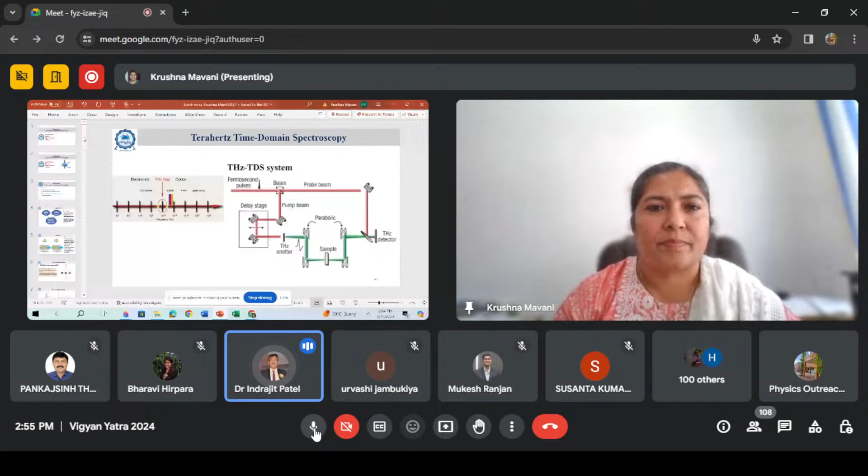Okay, I need to open my presentation, just a minute. I'll open my presentation and continue, just a minute. Can you see the slides yet? Window. Somehow I'm not able to share the PPT slide here. Please open the PowerPoint and there is an arrow upward present now, so your screen will be loaded. I have PowerPoint present. Open your Slides PowerPoint from presentation and then share the screen, that is the arrow upward. Yeah, I can see. Bottom. Yeah, thank you, that is useful. Wait a minute, share. Maybe I can try enter screen here, but it's not working. Yeah, but then I can see. Let us see. Can you see something now? Now if I open the slides, can you see? Now slides are visible, now go to the slideshow. Yeah, now I know, let me start from the beginning. Yes, can you see now? Perfect.

Yeah, so this is my topic, as you know, spintronics, a new route to futuristic technologies. So basically, let me start with the very fundamental idea of spin and charge, and how they originate from the electron.

You know that the electron orbits around the nucleus and has a spin momentum. Spin is the rotation of the electron around itself, and this spin, whether right-handed or left-handed, generates spin-up and spin-down states. So remember that spin has two states with respect to the up and down orientation, and the charge—electron carries charge. When it is moving in a medium, we call it current, when many electrons move in one direction. Now, since charge is associated with the electron and spin is also associated with the electron, which also has orbital motion, there is a spin-orbit-charge correlation which we generally harvest for applications in this area of spintronics.

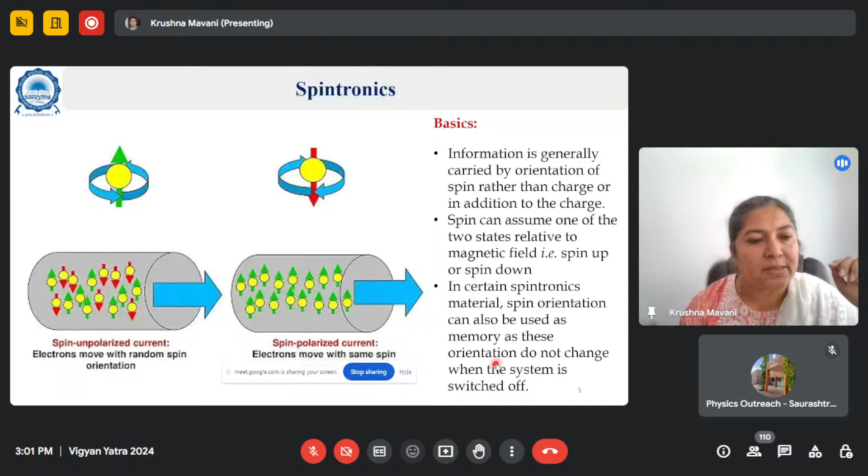Now you can harvest the spin functions as well, in addition to electronic functions. So this is the basic idea behind spintronics—information is carried by the orientation of spin rather than charge, or in addition to charge. Both are true. And when the system is switched off, in some cases the materials have a memory which can stay and doesn't go away. There are two types of memory, volatile and non-volatile. You should know that.

So the first thing we start with is giant magnetoresistance. This discovery was made by two scientists called Albert Fert and Peter Grünberg. In 2007, they were awarded the Nobel Prize for this discovery—the observation of giant magnetoresistance in a layered, thin structure. In the layered, thin structure, the spin exchange actually interferes with the electronic transport.

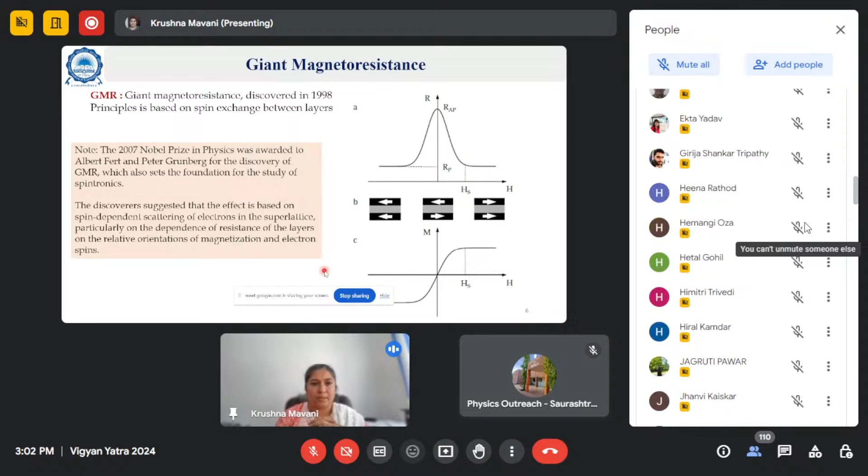So this discovery was very important, and it has set the foundation for the area of spintronics. The principle is that there are two layers—you can see in figure B here, I have shown the spin orientation of three different kinds. In the first one and last one, they are ferromagnetic exchange interaction. In the middle one, you have antiferromagnetic exchange interaction. In the case of a ferromagnet, if it is ideally parallel with each other, as you vary the external magnetic field applied to the layers, the resistance value is low.

What happens is, because it is ferromagnetically aligned, there is a spacer layer in between, and it is very easy for electrons to tunnel through because they carry the same type of spin. But when these materials are anti-parallel, what happens? There is a rise in the resistance—you can see the vertical axis actually rising up and showing a peak, and then again going down as you change the magnetic field again.

So this is basically like hysteresis. You can see this is your zero here in the center. If you increase the magnetic field towards the higher side, you can compare with the magnetization curve shown here—as the spin gets more and more parallel, magnetization is rising. At the end, the magnetization gets saturated at a certain value of external magnetic field. If you reverse back, in a soft magnet it will come back to the same path.

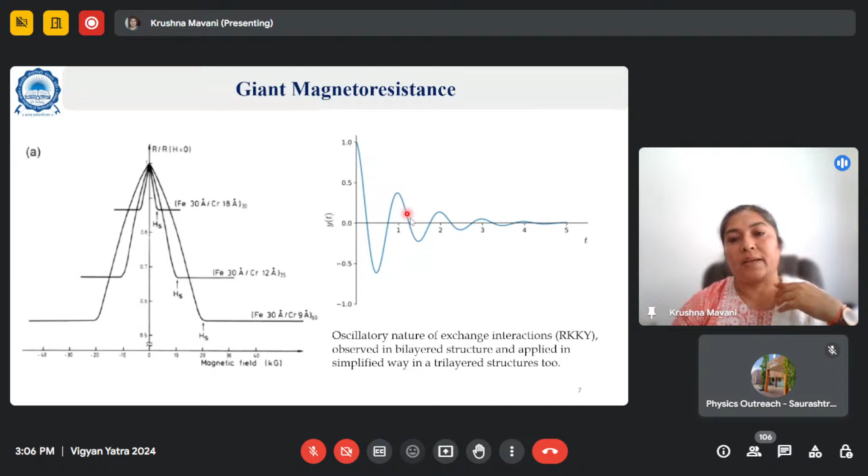If you vary the distance, I have shown one oscillatory function here. This one is typically shown as time dependent, but assume this is x, the distance, on the x-axis. As you vary the distance from one spin to another, it is ferromagnetic exchange interaction here, then as distance increases it goes to anti-ferromagnetic exchange, then ferro again, then anti-ferro again, and the magnitude is decreasing. This is harvested for

observation of giant magneto-resistance. Now that was very complex to understand. It was just a bilayer system when they observed it, only iron and chromium structure like this. So you have a spacer layer introduced between two magnetic layers. The spins are aligned parallel. If magnetic field is applied, they are first magnetized, then this is the situation.

This is just to understand how it works. Suppose you have one electron with a positive half spin, meaning spin up; it will go through easily without having any scattering at the interface. If it is spin down, reverse of this orientation, it will have multiple scatterings at the interface, and maybe it will not even pass through the multilayer.

This situation can be conceptualized as a kind of two-channel resistance circuit, which is easy to understand. Here you have a larger R, and if the spin is negative it will have more scattering at the interface, giving more resistance. Another channel, operative only for spin up, will have a lower resistance value. Similarly, this can happen for anti-ferromagnetic alignment, where scattering can take place at the interface for both types of spin alignment. This is understandable using this kind of diagram with a combination of larger and smaller resistances.

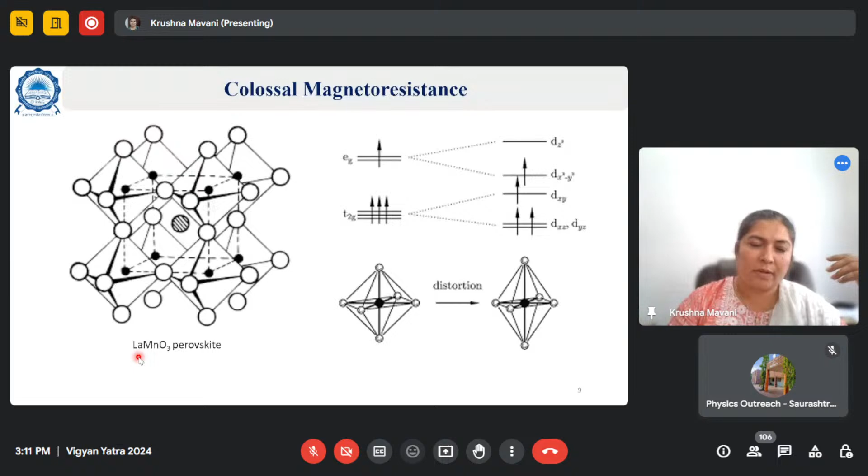This was the pure LaMnO3 perovskite. When I dope lanthanum - when I dope calcium at the lanthanum site, substituting maybe close to 25% - what do you see here? You have manganese converting into the 4+ state. Initially manganese is trivalent, but after divalent doping, it converts to the tetravalent state. So you can see 25% of the manganese ions in the tetravalent state here.

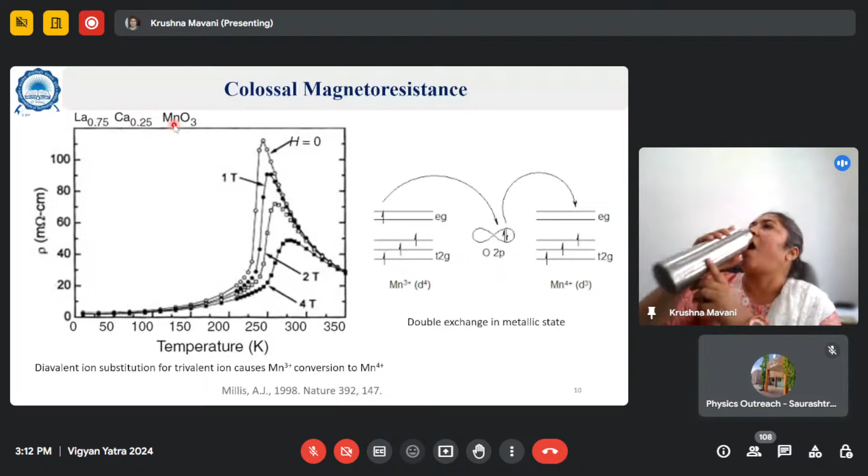As you apply magnetic field, what happens I would like to explain as a double exchange scenario. Initially your manganese was just 3+ and 3+, but when you have Mn-O-Mn chains with manganese trivalent and manganese tetravalent, the tetravalent manganese has a vacancy for an electron. Now the oxygen 2p orbitals overlap with the 3d orbitals of manganese.

So this electron can have double exchange. Once there is exchange with the oxygen 2p orbital, then again with Mn4+. So basically this Mn3+ and Mn4+ is a kind of dynamic state. While electron conduction is happening on application of electric field, when an electron hops from here to here, this becomes 3+ and this becomes 4+. So there is another vacancy here, and manganese on the other side can transfer the electron. This is the scenario called Zener double exchange.

A scientist called Zener proposed and explained it. Spins are parallelly aligned, so this scenario is possible when you have ferromagnetic spin exchange. So when more and more spins align, more and more double exchange of charge carriers is possible, so conduction increases and resistance decreases.

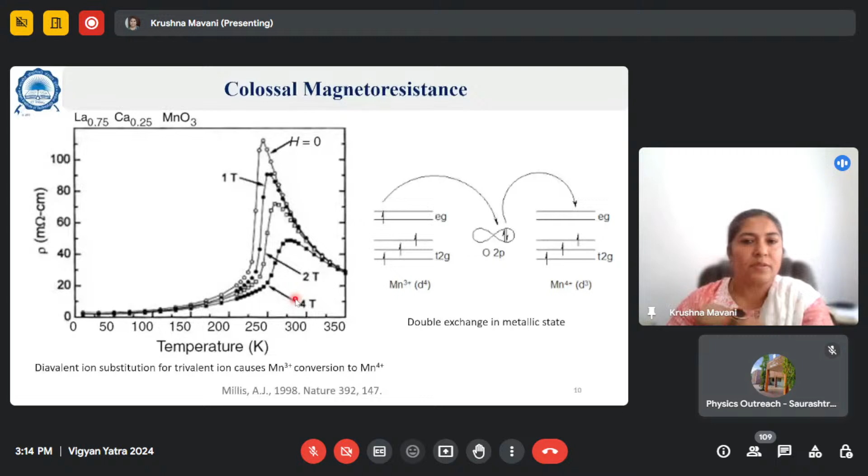So as you apply more and more magnetic field from 0 - H equals 0, 1 Tesla, 2 Tesla, up to 4 Tesla - this largely decreasing resistance is called colossal magnetoresistance, and since it is decreasing, it is called negative magnetoresistance.

Now there are some techniques and terminology which are recently observed. A few decades back they started, and many papers are available on this kind of material where they observe this kind of phenomena. These are some more recent techniques which I would like to briefly discuss.

Another one is tunneling magnetoresistance. This can happen even in layered structures. You can say the GMR case involves a bit of tunneling too, but let me explain this in detail. You have a barrier - a potential barrier between two magnetic layers. This potential barrier is actually produced by one spacer layer. This layer is conducting but has quite high resistance, so it's very thin, and the electron can tunnel through the barrier when you apply a magnetic field.

Let us understand - there are two situations given here. First of all, the TMR ratio can be defined. The TMR ratio is given in terms of P1 and P2, which are the polarizations associated respectively with the first layer and second layer here. How do you define polarization? Polarization is the number of majority charge carriers minus the number of minority charge carriers.

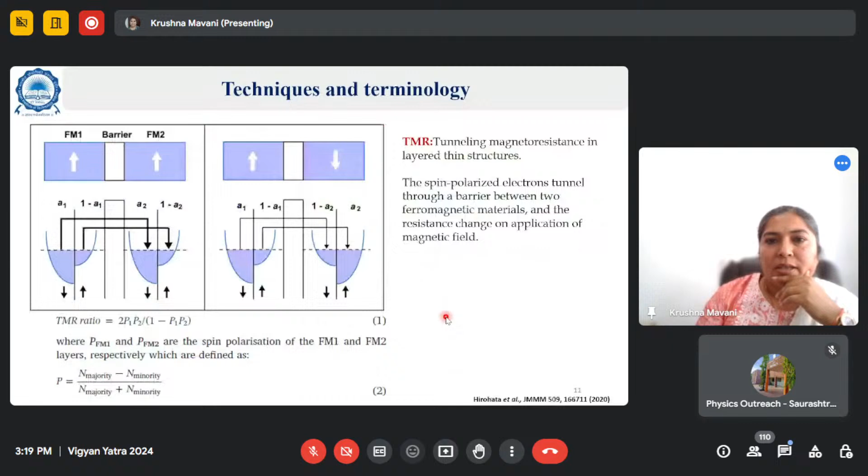Now this is spin transfer torque. This is spin alignment because of external magnetic field. Now we'll be talking about how, because of current, spin can actually be transferred from one layer to another. In this case, again I have shown you two different scenarios. It is used for magnetic switching, where here the fixed layer is fixed.

M fixed means magnetization is fixed, it is not free to move in any other direction. You have aligned fixed magnetization for one layer. Now you have a non-magnetic layer, which just helps the conduction, and it is thin, so electrons can tunnel through. And there is another magnetic material where M is free to move in any direction.

Now suppose your current is flowing from here to here, it means your electrons are flowing in the opposite direction, from left to right. So electrons are entering from this layer. They acquire, because of the influence of this, the magnetization acting like an internal magnetic field, which will influence each individual electron traveling through the layer. So as they travel, they now have some kind of spin polarization, and they go through the non-magnetic layer with the same spin polarization and enter here.

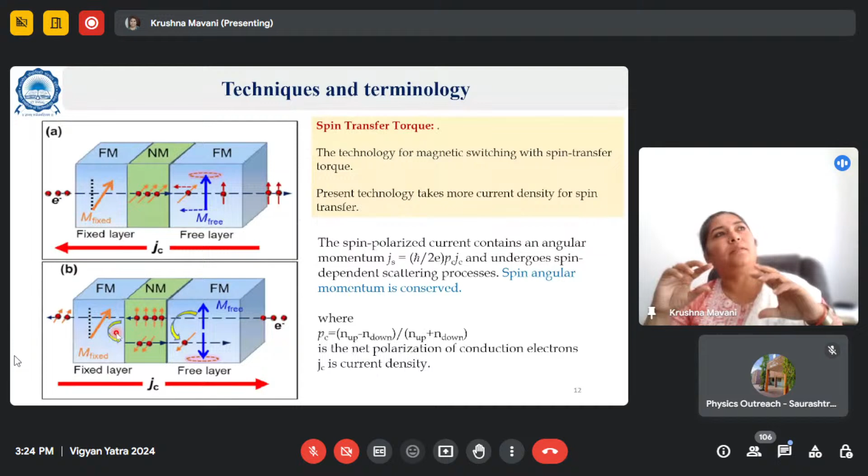It's like optical waves, when they get reflected back, there is actually a phase change. Similarly, if you see, they are tunneling through, there are quantum mechanical phenomena involved. So then they reverse back, and you have a torque generated in the opposite direction. They can't go through because of the scattering process at the interface. So in the reverse direction, you get this kind of spin alignment, here you have a spin-up kind of situation, and here slightly different.

Now there is another technique called racetrack memory. This is very recent, and many predictions have been made by IBM. I think in 2019 they started predicting this kind of 3D memory for computers. Here, domain wall movement is present. The name racetrack memory was given because initially the design looked like a racetrack, but now the design is slightly different, so nowadays people call it domain wall memory, because domain wall movement is involved.

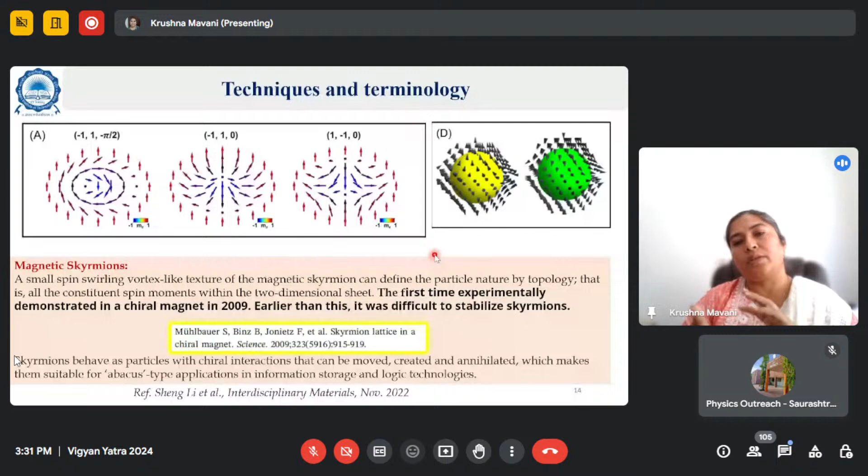Now these are kind of 3D skyrmions predicted to happen in some materials, where you have different types of spin alignment changing in a sphere pattern on a sphere. This has not yet been observed experimentally, but even optically you can tune these skyrmions, and many more research papers are being published in this area.

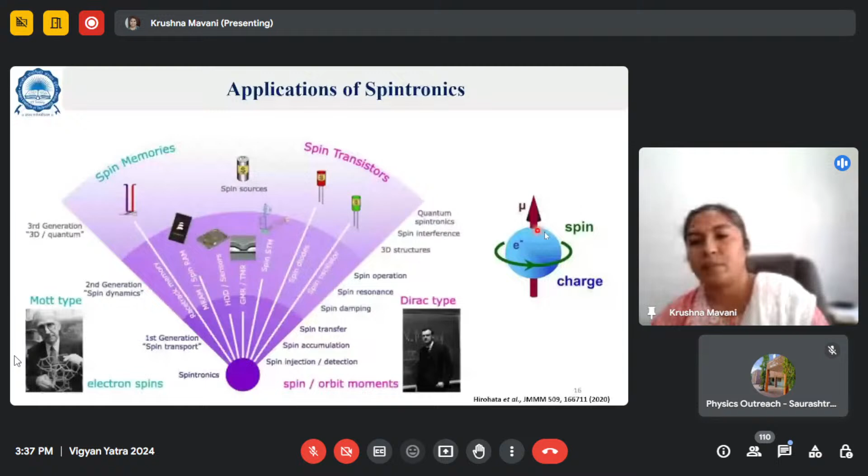So this all happens, as I showed you earlier in this figure, because originally it is coming from electron spin and charge, both. Spin can generate a spin momentum, orbital motion can generate orbital momentum, and these two correlations produce this Dirac type of materials.

So there is another thing now. These are the materials which can be used for spintronics, but there should be some way. You connect contacts, wires, which are non-magnetic materials. So how to inject spin polarized current? How to generate spin polarized current there, and how to carry it forward in circuits?

So there are a variety of other mechanisms available to do so. I have given one example here. The most common method is injecting polarized spin current from a ferromagnetic metallic conductor to a non-magnetic material, and then it carries the spin forward. If it scatters more, you lose it. So generally they are thin non-magnetic materials.

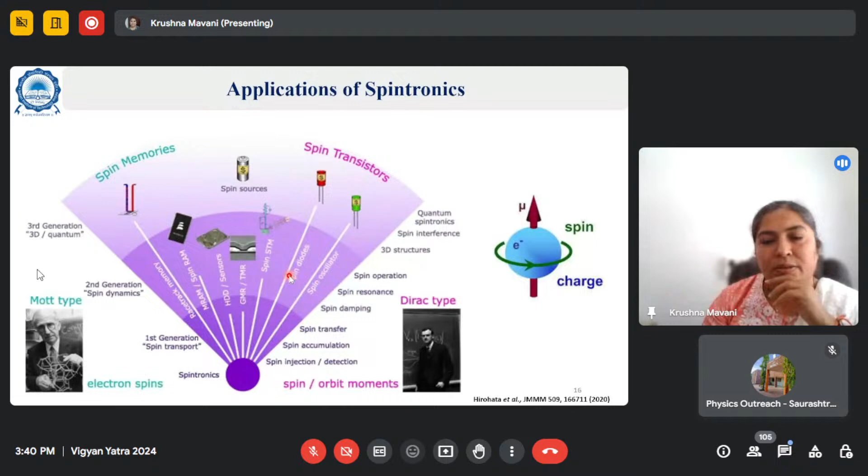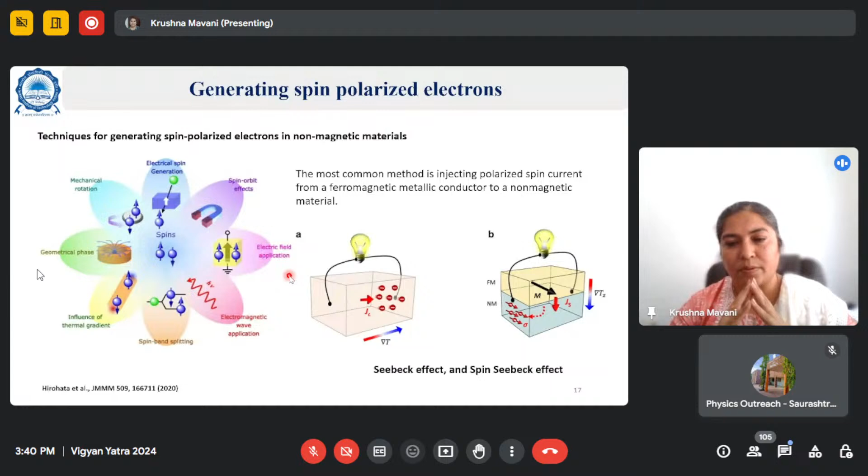So as an example, till now you have seen many applications, many terminology and different phenomena, and these are just a sample. If you go into details, I have always given some references here, you can refer to that.

It can be Fe-Mo or some other chromium and Mo. So these kinds of situations are possible. These B sites you can generally play with. Generally 3d metal ions occupy B and B prime sites, and then oxygen 6. So if it is perfectly alternate position, you call it a double perovskite because the unit cell is doubled.

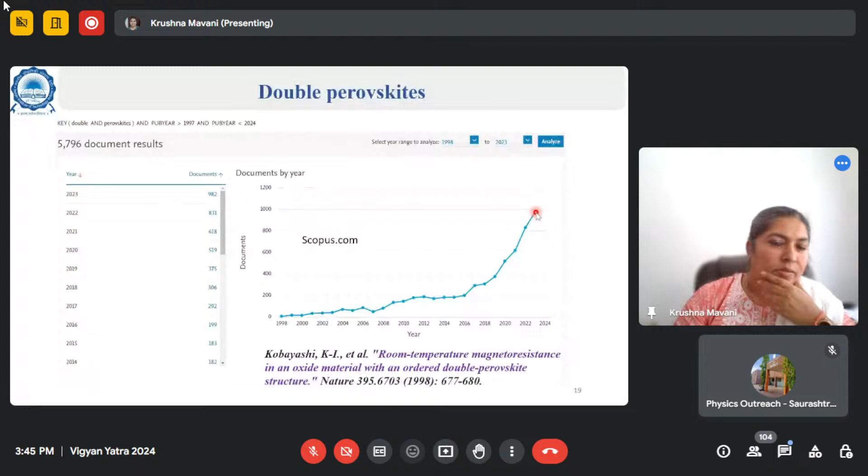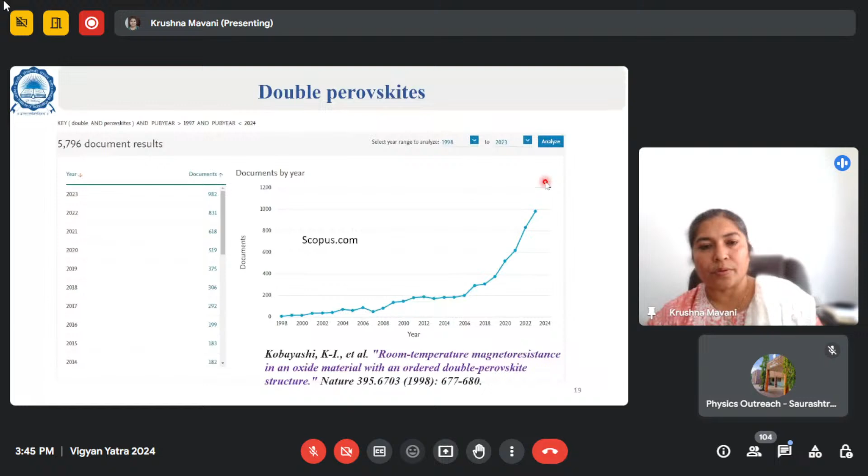If I search using 'double perovskites' in Scopus, you see in 2023 it's like 1,000 papers published with the keyword double perovskites. There can be many more. I just searched using Scopus here, and whatever is shown, I'm showing here. So it's consistently rising, and you can predict it's going to rise only because of this rise in the area of spintronics and their technology.

So these double perovskites generally have this kind of composition, where A site is occupied by strontium, then iron, molybdenum, and oxygen 6. Generally strontium is studied a lot. There are few papers also where you replace strontium with calcium and barium.

That is why they are studied, because at room temperature, if you want to use spintronic devices, you have to have magnetic ordering above room temperature. As you decrease the temperature, it will remain in the same magnetic state, whatever is achieved. There are no structural transitions involved, so it is more desirable.

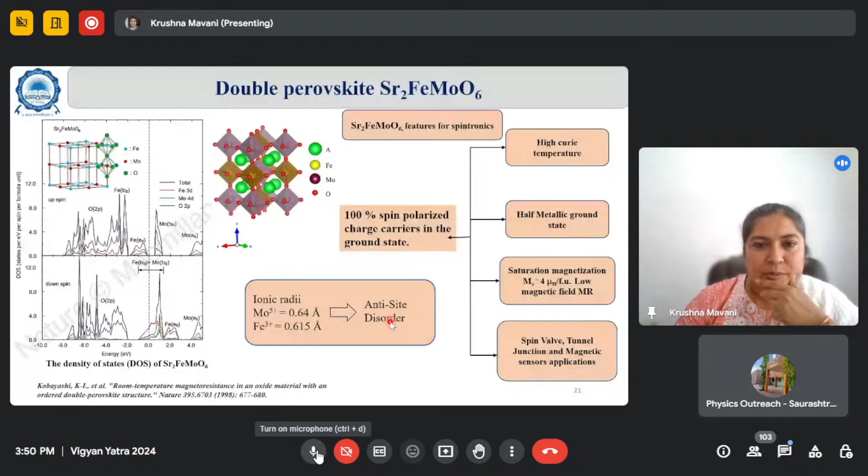By the way, how much time may I have? It looks like I have taken more time. Hello? Five to ten minutes, okay, then maybe I'll skip a few things.

Here I would like to show you that when you do thin film deposition, generally thin film deposition of double perovskite is not so easy. Only PLD grown films are generally shown to have half metallic nature and perfect cation ordering.

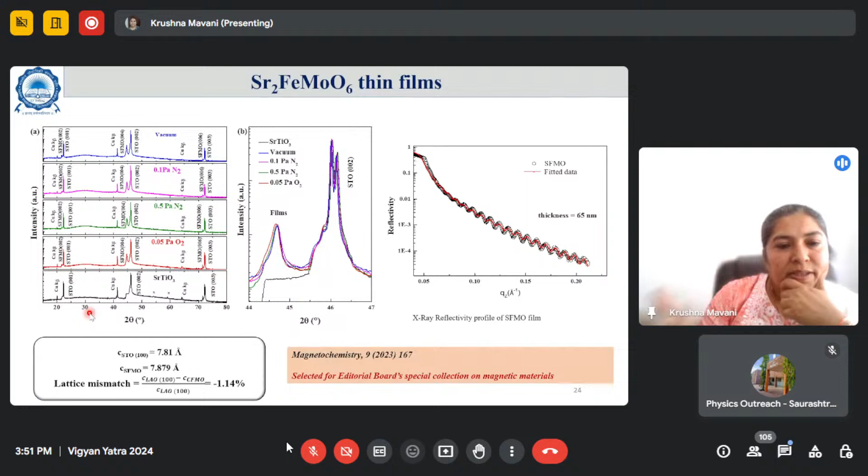One important feature we observed in our laboratory is that when you vary the background gas pressure from low to high, you can see impurities coming up. So what we observed is that it is better to have vacuum and deposit the films, giving very high cation ordering at the B site. This was published in Magnetochemistry recently and was selected for a special collection. We could see that as we changed the gas pressure, the highest cation order was observed only in vacuum. Later on, whatever we deposited, we went ahead with vacuum only.

So these kinds of films with different gas pressures, the maximum was always achieved in vacuum, shown here by the highest magnetization. Now you may ask me why highest magnetization shows that it is a high cation order. The reason being...

Fe-O-Mo exchange is ferrimagnetic in nature. Ferrimagnetic means one sublattice has up spin, the other has down spin, but unequal in magnitude. So the compensating spin is smaller in size, giving some net positive magnetization. This situation arises only when you have an alternate Fe-O-Mo arrangement. Otherwise, it is antiferromagnetic or paramagnetic, which does not contribute so much to the magnetization. So it is a clear indication: higher the magnetization, higher the cation order.

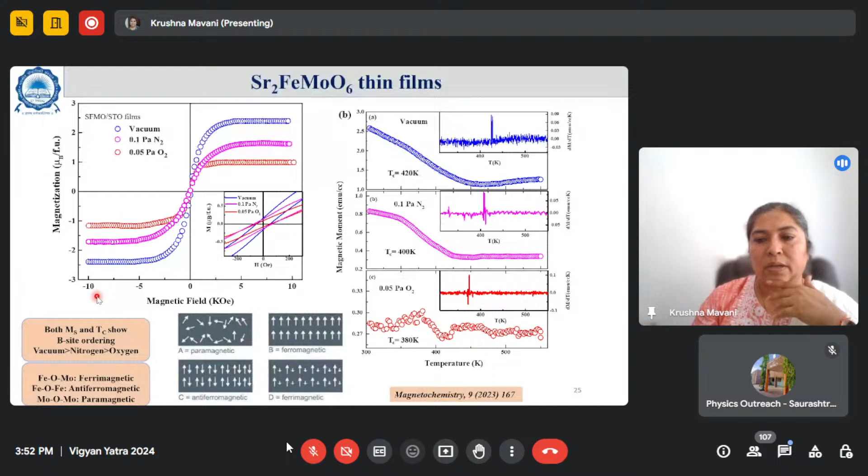That we have observed clearly in our thin films.

We have another feature added here in addition to vacuum. If you choose your crystal very wisely, 100 oriented or 111 oriented, depending on that you can also control your cation order. As you control the cation order, the half metallicity is intact, and you can have more and more spin polarization in this material. This alignment is possible when you have 111 crystallographic orientation beneath the thin film.

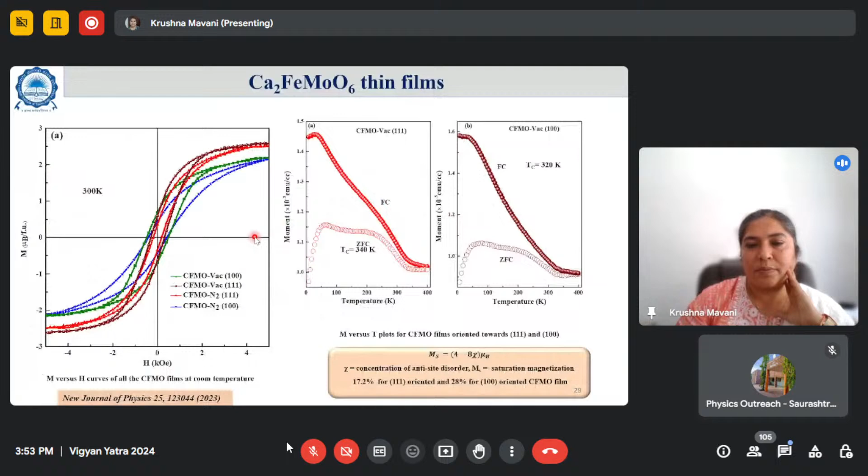We have proved this efficiently using a variety of experiments, including terahertz time domain spectroscopy and Raman spectroscopy. In Raman spectroscopy, we did temperature dependent Raman spectroscopy of selected thin films having very good cation ordering, and found that this variation in Raman shift can be fitted to the Balkanski model, where the anharmonicity coefficient can help us understand whether there is any coupling between spin and phonon.

So spin phonon dynamics are coupled, which can be seen very clearly in our results, because there are drastic deviations from the trends near the transition temperature. This is the first such experimental observation found in double perovskite thin films, published recently in New Journal of Physics. Earlier, no such spin phonon coupling had been reported in bulk of these materials - only thin films show this kind of coupling, and we could observe it experimentally by various techniques.

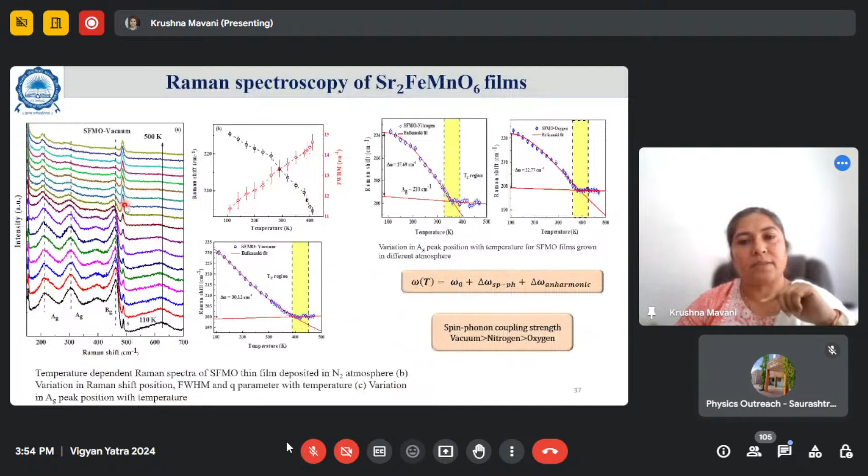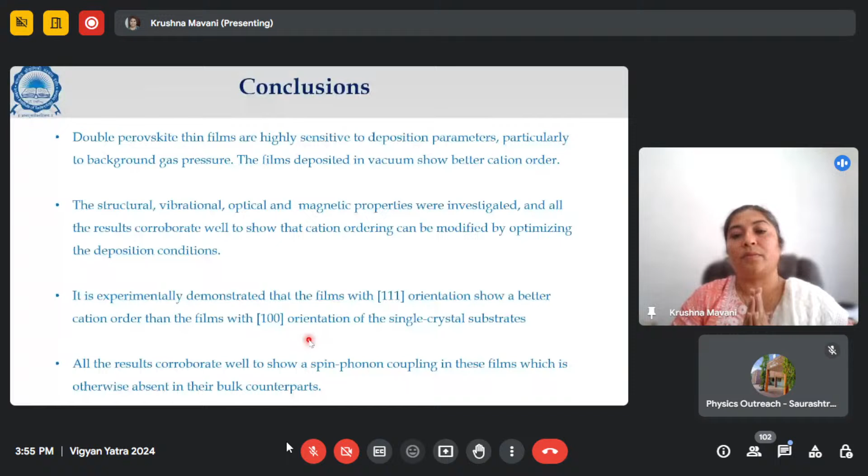So to conclude, these double perovskite thin films are highly sensitive to deposition parameters, particularly the background gas pressure. We have successfully produced nice films in vacuum conditions. We did various experiments and modified them as per different deposition conditions and substrate orientation, and experimentally demonstrated that 111 orientation is best to get the cation order. Our results corroborate very well to show that there is spin phonon coupling in these thin films, which is absent in their bulk counterparts.

I would like to acknowledge BRNS and SERB for funding these projects, and the DST FIST project of our physics department at IIT Indore, under which we have procured a Raman spectrometer. I would also like to acknowledge my two students, Dr. Ekta Yadav and Mr. Ketan Naule - this is the PhD work of these two students, and presently Ekta is a postdoctoral researcher at IISc Bangalore.

This is my research group at IIT Indore. Some alumni are present here - he's working at IISER Bhopal at present, and she's an assistant professor in a private college in Indore. Thank you all.

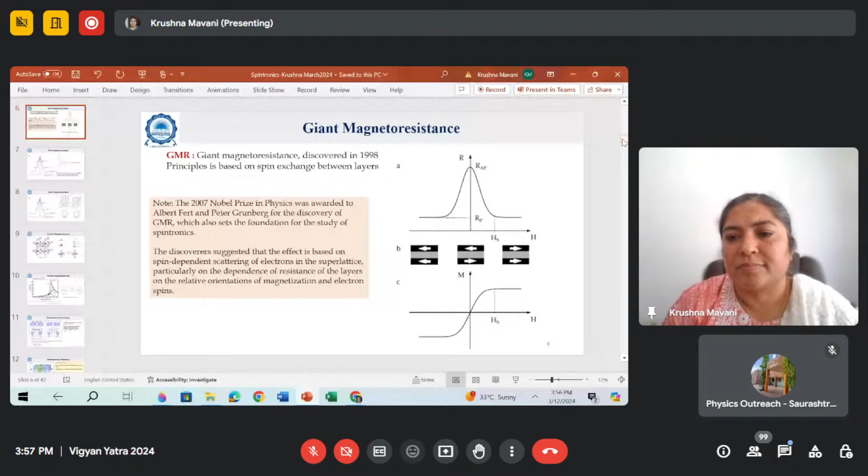Hello. Hello. Hello, madam. Hello. Hello. I think there's some technical problem. Madam has left. Anyone?

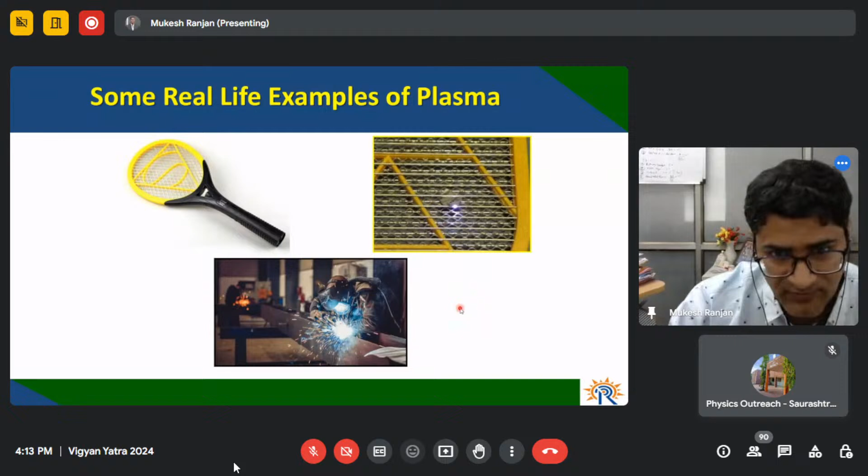If you've seen, I've presented different kinds of examples—one is the welding example, where welding can actually melt the material, and in some cases you can touch the plasma. That's the reason plasma is basically divided into two categories: cold plasma and hot plasma.

Cold plasma has many applications, like surface modification, which I'll discuss later. Another type is hot plasma, where the electron temperature is roughly equal to the gas temperature and the ionization is very strong. It also has many applications, like waste disposal and metallurgical applications. So my talk will cover both types of plasma—cold plasma and hot plasma.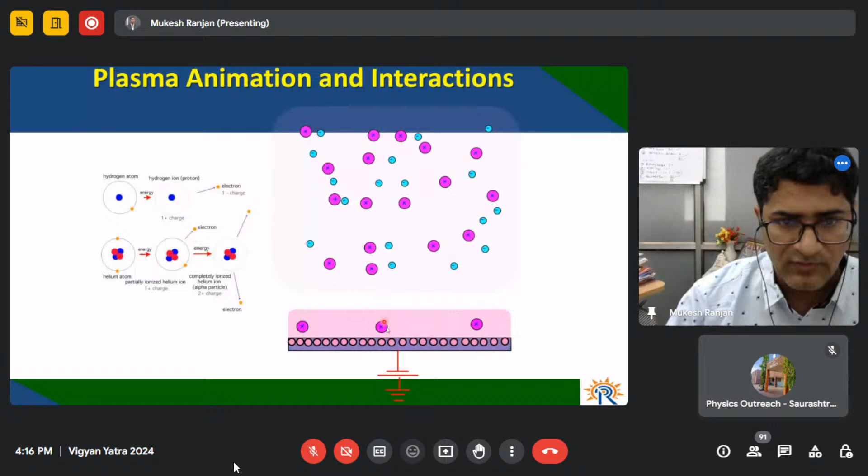Whenever some surface comes in contact with plasma, the ions start bombarding it. In this picture, I've given a negative DC power supply connected to some surface. When this surface comes in contact with plasma, the ions from the plasma start hitting it. In this way, the surface can be modified with the help of plasma.

So plasma has many applications in different directions. The first one is the automobile industry, where different kinds of coatings—anti-reflecting coating, super hydrophobic coatings, DLC diamond-like coatings—are used in different parts of automobiles. Tokamak is the fusion reactor where people are trying to make energy like the sun makes continuously. Worldwide research, including in India, is going on for tokamaks for energy generation as a futuristic project. The third one is waste disposal, where energetic plasma torches are used for waste disposal. Agricultural plasma also has many applications in agriculture. So I will touch all these topics one by one while showing you some examples: medical, textile, nanotechnology, and space.

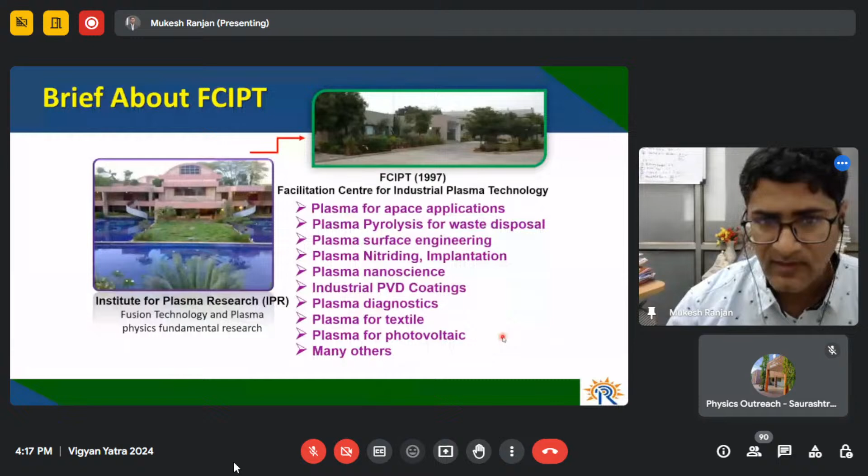The first example I'm going to show you is plasma technology for waste disposal. Nowadays waste is a very big threat for any growing city. You must have noticed that all the waste is collected from your home and then it piles up at the end of the city. After some time, the city gets extended, and some people end up living very close to the area where all this waste is piled up. So it's a big problem for the people living nearby.

You might have seen smoke coming out from this waste, because in these places the government tries to use incineration, where they dump the waste and burn it using kerosene oil or petrol. If some waste comes from a hospital and is hazardous, or has some deadly virus, it can also spread to the nearby slum area. So waste treatment is very important and crucial, and I think it's a very important key topic for the modern city concept that has to be taken care of.

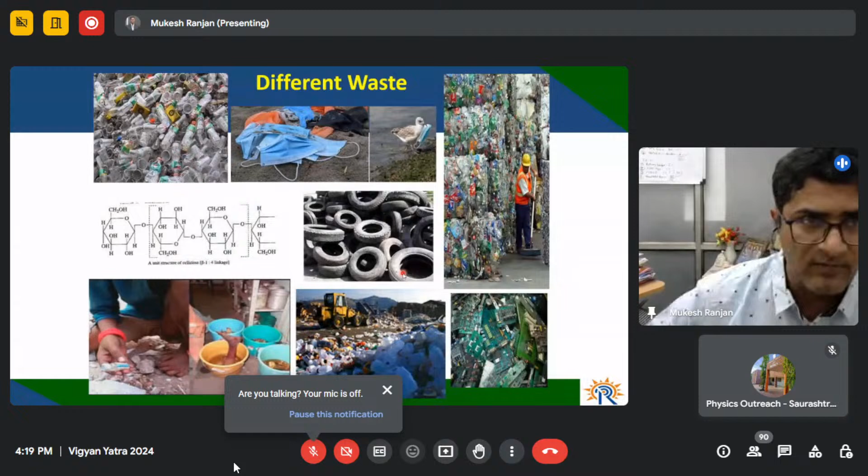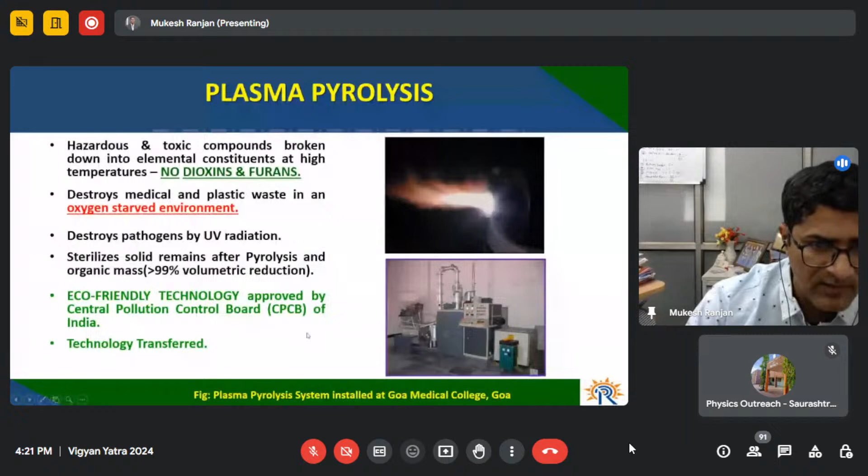Plasma also has a nice property: it kills bacteria and viruses because it emits UV radiation. So you are not only decomposing your waste but also killing hazardous or deadly viruses in this process, and there is no waste generated later on. In a normal burning process, once you burn something you end up making some kind of ash, but in this process you only make different kinds of environment-friendly gases. This system has been developed over a period of time, and the Central Pollution Control Board of India has given its approval for this plasma pyrolysis system.

By performing several R&D experiments over a period of time, this system was successfully proven to be a very good clean technology for waste disposal.

We initially started with a low capacity system, like 15 kg per hour, installed in Goa Medical College in 2004, where 3.5 tons of waste was disposed of over a 1 year duration.

Another system was installed in Gift City, Gandhinagar, a modern city where a multi-story building has all its floors connected to the plasma pyrolysis system. Whatever waste is generated is directly sent to this system and decomposed there, with the advantage that you don't have to shift garbage from one place to another.

After developing this technology, we have transferred it to different companies from time to time, and they are doing marketing and making improvements in the system over time.

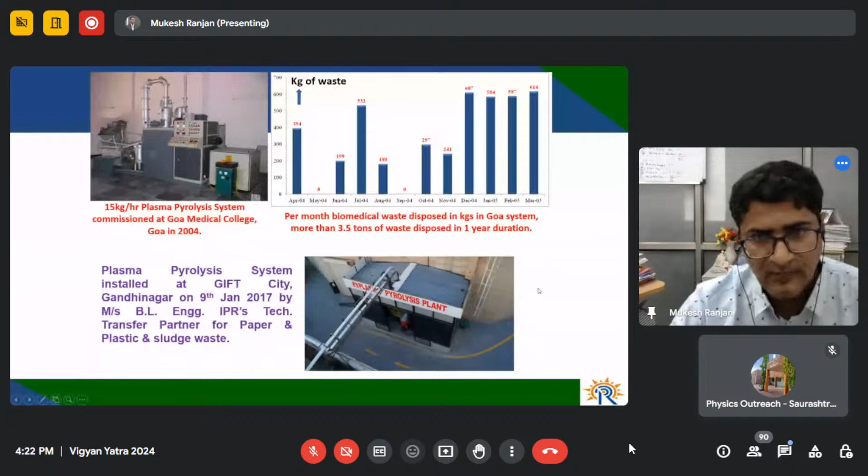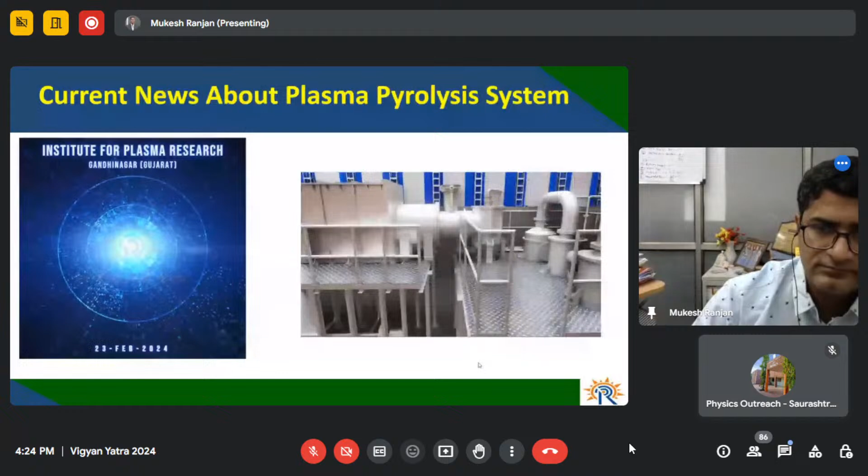This is what I've shown you, a very proven technology, and our institute has received several awards from time to time for developing it. I hope in future you will see several such systems at different places.

With this, I move to another technology also developed at our place: plasma technology for increasing the life of steel components. Steel is the main component used in industries; any kind of tool is made of steel.

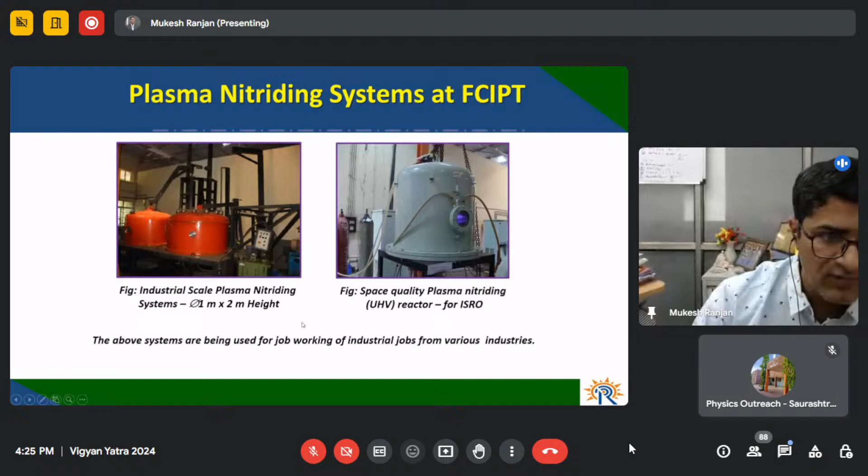We have developed a process known as the plasma nitriding process. In this process, you put an SS component inside the plasma and give it some negative potential. Since SS is conducting, connecting it to the negative power supply attracts nitrogen ions, which then diffuse inside the layer of the steel.

Steel has the problem that if something made of it is left outside, it will easily rust. After some time, you'll see the color changing to reddish as iron oxide starts forming. Also, if a tool is used frequently, industries want its lifetime to be much longer, which is why this plasma nitriding process is very effective.

The nitrogen ions diffuse inside the steel up to hundreds of microns, depending on the dose given, and they make it anti-corrosive resistant and increase the hardening of the steel component. I'm going to show you a movie of how the plasma nitriding process is actually done.

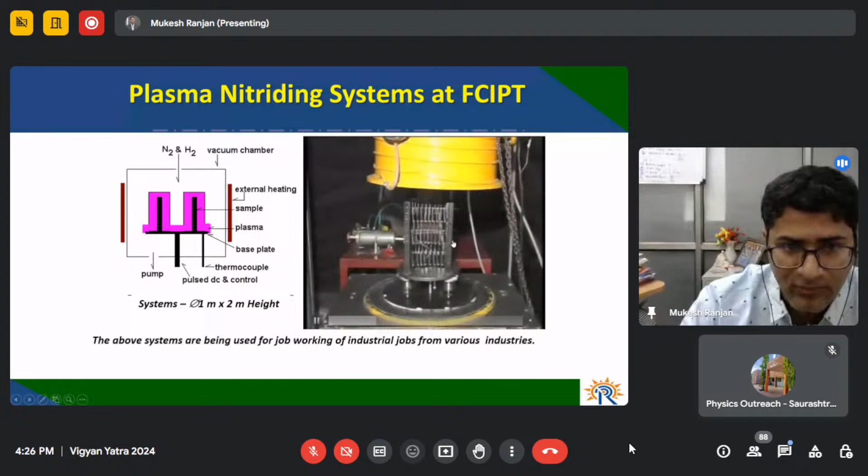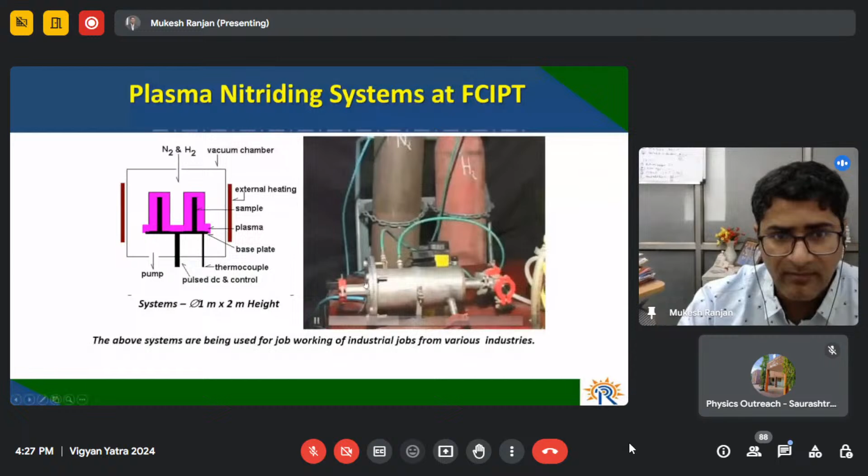I will show you that we regularly do job work for industry people, and we have a very big size plasma nitriding chamber available with us. After mounting, we use in-house, indigenously developed power supplies, and all the database for different kinds of steels is available with us.

From time to time, students are also doing PhD work on the plasma nitriding process. So even though it's a commercially available process, research is still going on to improve it further.

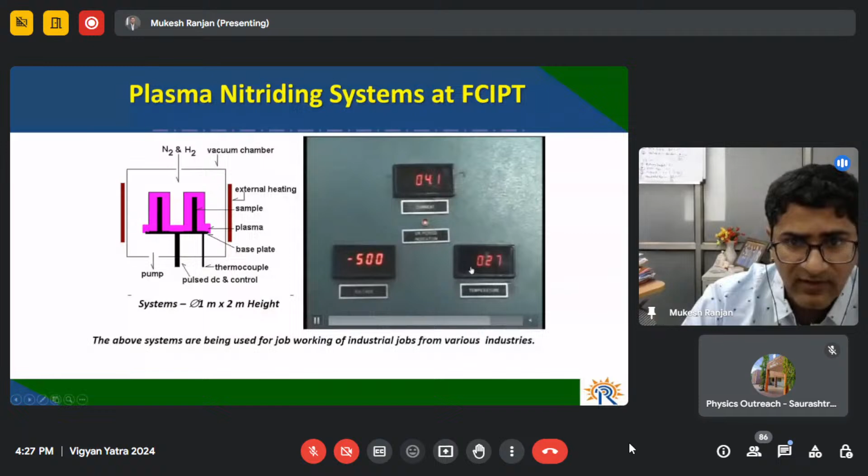Now you can see that the plasma nitriding process is actually going on. Whenever you see the pinkish color, that is a representation of plasma. These tools are now getting plasma nitrided, and this process keeps going day and night. It has to be very stable, so initially you see some flickering happening - that is the surface cleaning process going on, and then after that the nitrogen starts going deep inside the layer.

Based on the size of these tools, you can see the different variety of tools that can perform plasma nitriding. It is not a shape dependent process. Whatever you immerse inside the plasma, it will get plasma nitrided from all directions, very homogeneously.

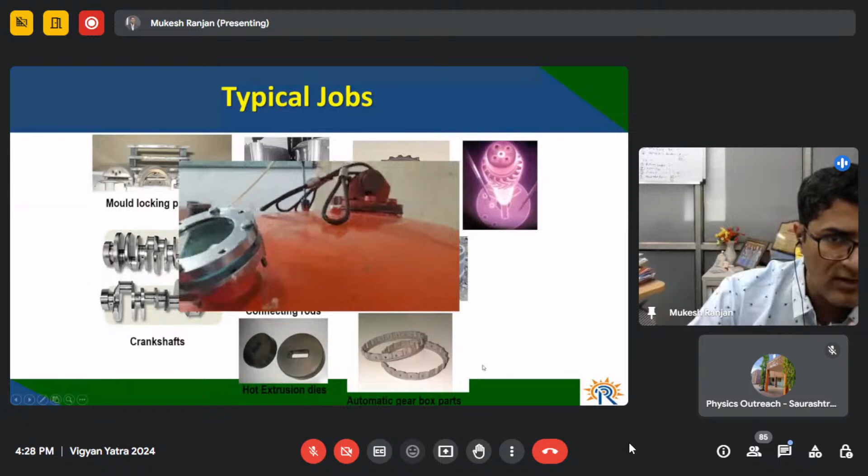This is another big reactor where you can see the plasma nitriding process actually going on with industry bearings. You can see.

There is another competitive process known as chemical nitriding. The difference between chemical nitriding and plasma nitriding is that with chemical nitriding, you end up making some kind of waste chemicals, so after the process, the chemical has to be disposed again. This is a big problem if you're dealing with large components on a regular basis. That's the reason plasma nitriding is a very clean and effective way of doing the process. As I said, it is not a shape dependent phenomenon, because plasma has the beauty of distributing whatever you immerse inside it very homogeneously in the surroundings.

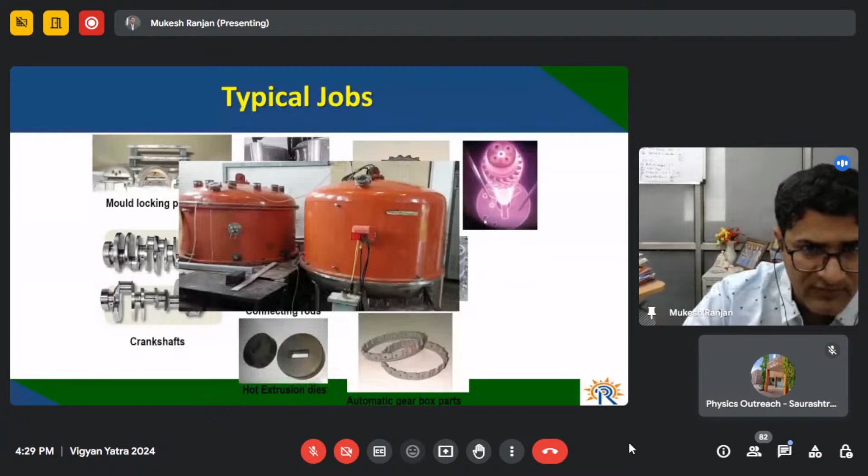This is an example of plasma cleaning process on valves. Plasma is known as a very good cleaner. If you know, when you go to the market for repairing - let's say if there's a puncture in your tire tube - what they do is simply clean the surface by rubbing with emery paper. Emery paper has small glass particles on the surface, so when you rub it, you are cleaning the surface to make it more reactive. You are releasing the bonds.

With a sandpaper, these glass particles are actually separated by fractions of a millimeter or some hundreds of microns. But once you do the same process with plasma, you are actually bombarding energetic ions on the surface, doing atomic cleaning. So emery paper cleans at a micron or millimeter scale, but once you immerse something inside the plasma, you are actually cleaning at an atomic scale. That's the reason plasma is a very good cleaner.

There's a company which is the largest manufacturer of this kind of valve. In all the tire tubes, you have a brass to rubber bonding - this is what you see on your screen. This brass to rubber bonding has to be done in a very clean manner. So this company approached us to see whether it could be done with the help of plasma. We developed a very big chamber where thousands of such valves can be treated, and you can see that this treatment is going on.

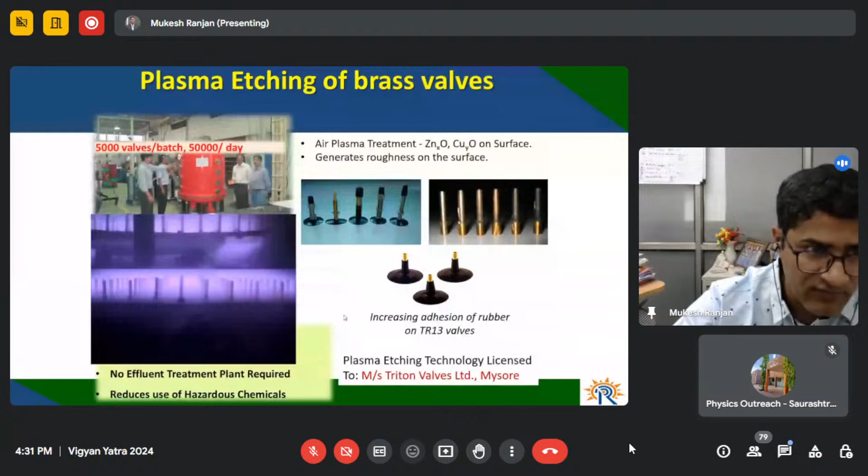We have transferred this technology to the company M/s Triton Valves in Mysore. They are regularly using it and have made several more bigger systems of this similar kind. This is what I was showing you - that plasma does the cleaning at an atomic level.

So till now, whatever I was showing you, either you have seen plasma inside a vacuum system, or in the plasma pyrolysis system, the energetic torches, the energy of heat generated was so much that you cannot touch it, because that was used for pyrolysis purposes. But now, very recently, a touchable plasma jet has been developed, which is shown in this movie. You can see it, and then we'll discuss about it.

So what you will see is a fancy plasma torch, which is very handy. My friend is showing you that he's putting this plasma plume on his skin, and you can see that he's not getting any shock and he's not getting any heat generated on the surface. So it's a touchable plasma. This touchable plasma has now come up with many applications, which I discussed earlier, used as a health treatment.

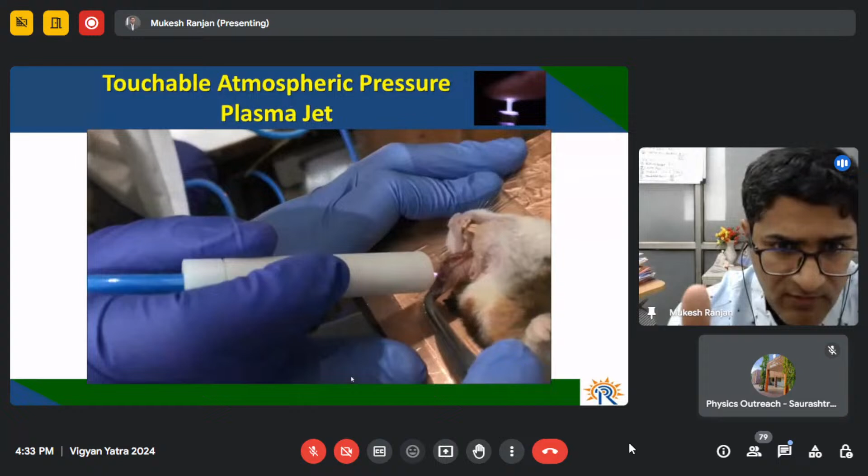In this case, a hamster has an artificially generated oral cancer in his mouth, and then they systematically, after taking approval from the department, treat the buccal pouch cancer. We have seen that after 1 day, 3 days, 5 days of treatment, the tumor slowly started shrinking. You can see that after the 4th treatment, on day 8, it becomes black and then falls down from the buccal pouch. So based on one experiment, we cannot conclude.

So for several years we have been trying to do this kind of experiment on different kinds of mice, because sometimes it also depends on the immunity of the mouse. So continuously we are doing experiments. Getting ethical permission for any device to be approved takes a lot of time and trials. So at the moment, this kind of trial is going on not only in India but worldwide, on different mice, and people are reporting results showing that in certain cases, certain cancers show a positive response to the treatment.

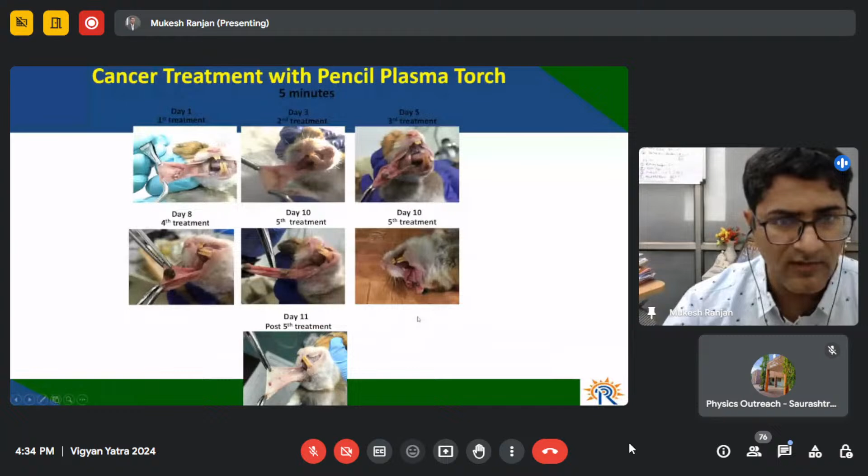Another application of this pencil plasma jet is that it can treat a kind of fungal infection found in the West. A lot of laborers were getting this Tinea Cruris disease, which looks like eczema. Earlier they would go to the hospital and have to buy a very expensive paste to put on this skin disease, and after a certain period it would come back again.

With treatment using this pencil plasma jet, we have successfully seen that after a few trials, it slowly goes away permanently, and they don't have to come back for treatment again. Earlier, when using cream or paste, it was only applied on the surface, so it was not killing the fungal infection deep inside the skin. But with this pencil plasma jet, the ions and radicals can actually penetrate inside the pores of the skin, making it more effective compared to other treatments.

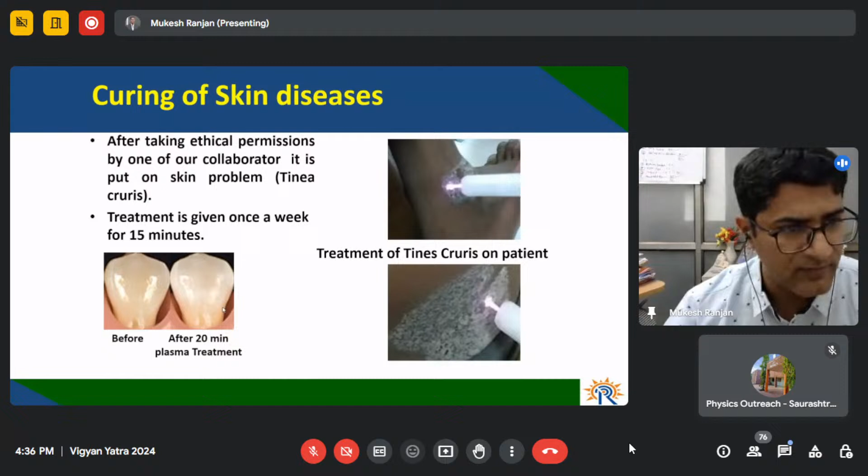This kind of study is also currently going on. There are also reports of people using the pencil plasma jet for tooth cleaning. We have sulfur deposition on our teeth which can make them yellowish, so hopefully in the future dentists will also use the pencil plasma jet. We are already doing some collaborative work with different dental institutes to see whether dental cleaning can be possible with this pencil plasma jet.

It's also very good for blood coagulation. Whenever someone has an accident, there are already reports that using the pencil plasma jet coagulates blood very fast. There's a possibility that this kind of pencil plasma torch can be kept in 108 emergency vehicles, so that if a lot of blood is coming out from a wound, the doctor can treat it very fast and stop the blood flow to save the patient. Even on YouTube you can see doctors using it after surgery to stop bleeding, using this kind of pencil plasma torch after the operation.

This kind of pencil plasma torch can also be used to clean vegetables. If there's pesticide on the surface, this pencil plasma torch can remove it. We made a shower of this pencil plasma torch, and with the help of labs we tested that once treated with the plasma jet, the pesticide molecules move away from the surface and it becomes perfectly clean. So there's a possibility you could have a shower-like pencil plasma jet in your microwave oven, run it, and it will make your food pesticide free.

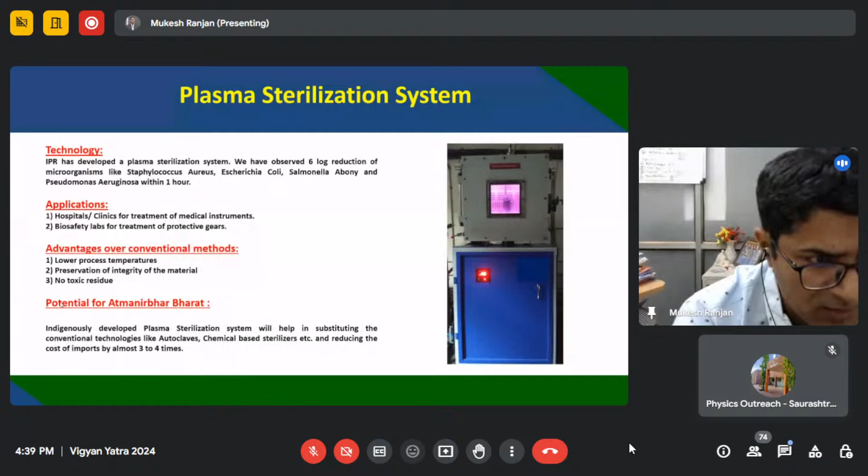Plasma sterilization is already used in industries. Companies sell this kind of system commercially, and they are very expensive—for example, Johnson & Johnson sells plasma-based sterilization systems, and some hospitals in India already have them. We have also developed this indigenous plasma sterilization system at IPR, and the technology is about to be transferred.

Plasma also has applications in agriculture. If you have a seed, normally it takes some time for germination. There are reports available, and in our own work we have seen that when some seeds are treated with plasma, it removes the upper shell of the seed and makes its surface hydrophilic.

So it absorbs much more vapor, water, or other content, and grows faster. You can see the SEM images of the seed before and after treatment—the untreated seed is very smooth, while the plasma-treated seed has some roughness generated on the surface. Once surface roughness is generated, the surface area increases, and it more easily absorbs water from different sides, which is how the seed grows faster.

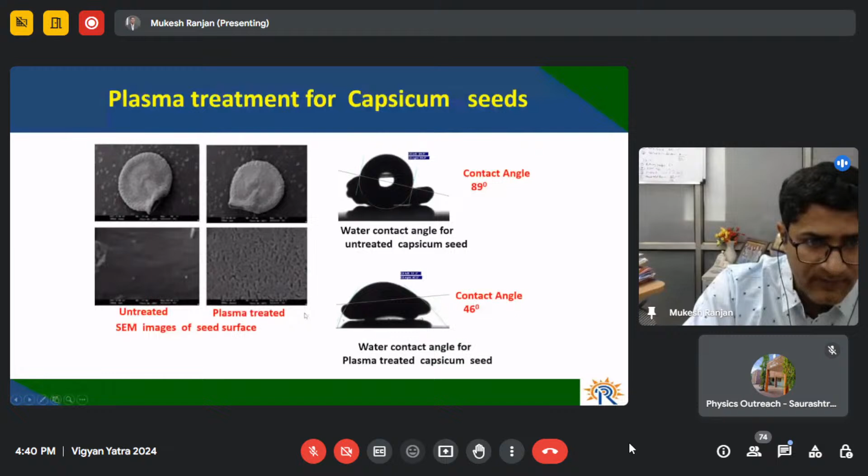We are working with Anand Agriculture University—we have supplied a system to them, and we also have one at our institute, because seed germination is a process where we have to study statistics. We treat thousands of seeds, treating different kinds of seeds at different times, and then observe how fast they germinate.

You have to wait several days or months for the seed to start germinating, and then compare the optimized time for plasma treatment and how effective the germination is for a particular type of seed versus another. This is a broad area where a lot of data has to be generated for different kinds of seeds to understand how plasma technology can help seed germination. But so far we have found it very promising, and worldwide a lot of research is also going on this topic.

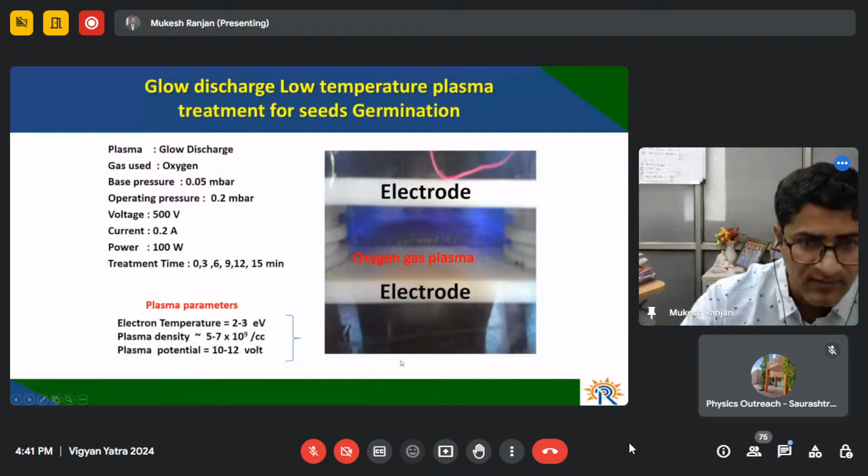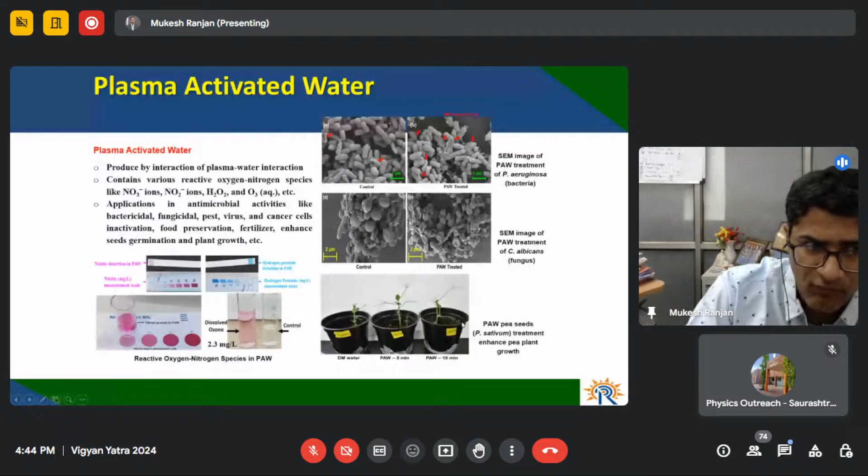The bottom example you can see is plasma activated water used for plant enhancement. The first plant was given normal water, and in the second case plasma activated water was given. You can see that the second and third plants grow faster compared to the first plant. So this works as an alternative to urea. You don't have to give chemicals to your plant; just put some plasma activated water on it, and it will grow faster because it's a substitute for giving nitrogen.

So with this, I have shown you that plasma has applications in waste disposal using plasma technology, pyrolysis technology. Plasma has applications in industries where the plasma nitriding process is working. Plasma has many applications in health, where the plasma jet is used for different fungal infection treatments and for cancer treatment. Plasma activated water has many applications—it works like a sterilizer, and it also works like a urea. Plasma also has applications in health science, with equipment available for plasma sterilization.

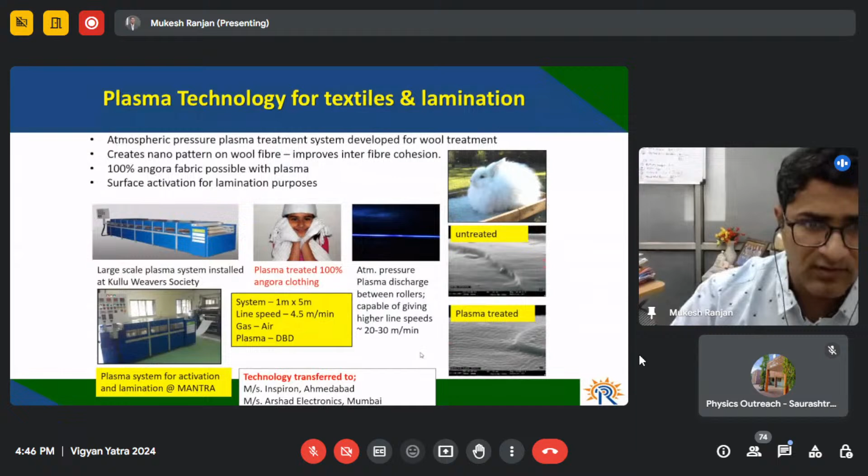So now, with the help of this plasma treatment, one can make 100% Angora fiber clothes out of it. It's a very successful technology, and if you search Google, worldwide people are using plasma-based technologies for treating textiles. Some other examples you might have seen on Facebook or WhatsApp are barbers actually burning the hairs.

While burning the hairs, plasma actually makes your surface more reactive. Once plasma treated, you can see the dye is absorbed much more compared to the untreated one. Plasma makes your surface more active and removes contamination, helping dye molecules spread more homogeneously on the surface and deeper inside. Also, because the roughness increases the surface area, the dye is absorbed much more compared to the untreated sample. So this is another example: if you treat the textile with plasma, its surface becomes much more reactive and can absorb the dye very easily.

Another example is this blue color bond, the khadi treatment. Khadi naturally has a wax on the surface which doesn't allow it to absorb any dye, which is why khadi normally comes in only one color. If you treat the khadi with plasma, you can see it absorbs color very easily. What plasma does is remove the wax from the surface, making it easily able to absorb different kinds of dyes. With this experiment, even khadi can be used for different colors.

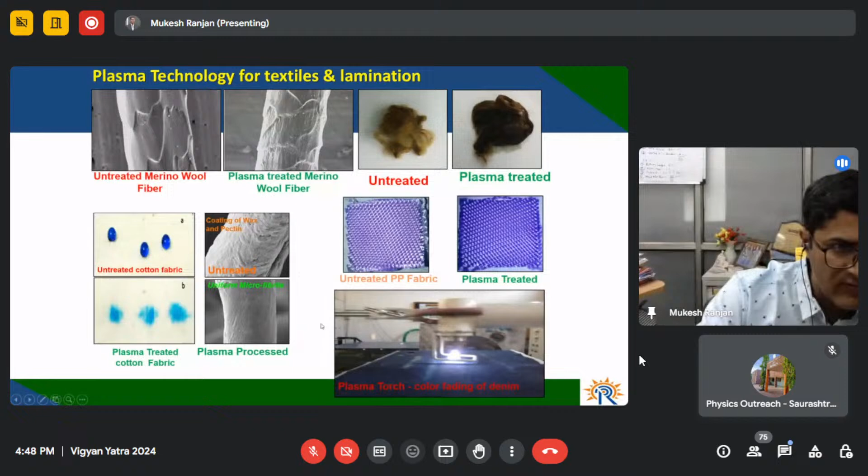Another example is plasma torches used for making monkey wash kind of designs on the surface. You can computer program your plasma torch to write different designs on the surface. This example shows plasma torch color fading of denim. Depending on the time of exposure, as I said, it helps absorb color, but it also helps remove color from the surface, depending on the dose or energy you choose. This way you can write different structures on the surface. So plasma-based technologies are being explored for different applications in textiles.

Another example is the wings of a bee, which also have nanostructures. If you are artificially able to make nanostructures on a surface, in principle you can make any surface super hydrophobic or hydrophobic. We have done a similar experiment in our lab.

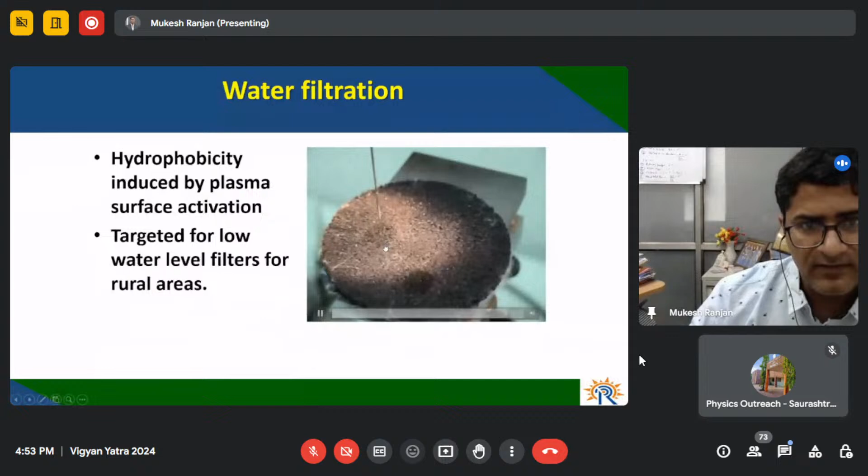But when you treat it with plasma, you can see — the filter is now plasma treated. You can see it immediately: the moment the droplet falls on the surface. So plasma can be used to make a surface not only hydrophobic but also hydrophilic. So not only by making nanostructures on the surface, we can also play with the surface chemistry to make a surface super hydrophobic. This is an example where we can make a Teflon-like coating on the surface using the plasma process, which is super hydrophobic in nature.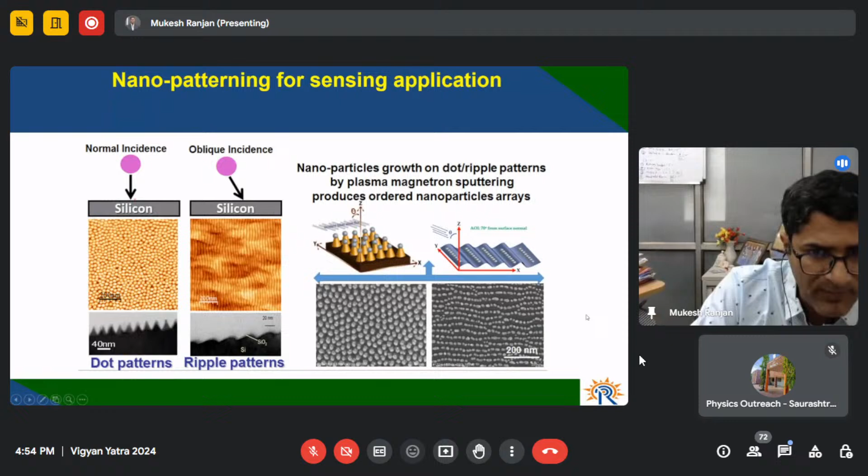Once we make this kind of pattern on the surface, it can be used as a template for growing nice chains of nanoparticles. Whenever we talk about nanoparticles made through chemical processing, the problem is that the metal nanoparticles start agglomerating, and there's a lot of chemical residue remaining with them — so they are not pure in form. But if you pattern your surface with plasma processing, you can use it as a template to make nicely arranged chains of nanoparticles. Once they are nicely arranged, they have a unique property compared to randomly grown nanoparticles. I'm going to show you an example.

We have developed a technology based on this nanopatterning combined with nanoparticle growth — it's a highly sensitive Raman sensor. If you remember the talk given yesterday by Professor Dheeraj, he discussed surface enhanced Raman spectroscopy. This says that in the presence of metal nanoparticles, the sensitivity of the Raman signal is increased drastically. So basically it is used for detecting molecules.

So if you have a very low concentration of a molecule, you cannot detect it with the help of Raman spectroscopy because the intensity is very low and the characteristic peak of Raman is not visible. This is what is shown in this presentation. The first example is a normal Raman spectra, and the intensity is very low with no peak visible. The example you see is the rhodamine 6G molecule at a very dilute concentration of 10 to the power minus 6 molar.

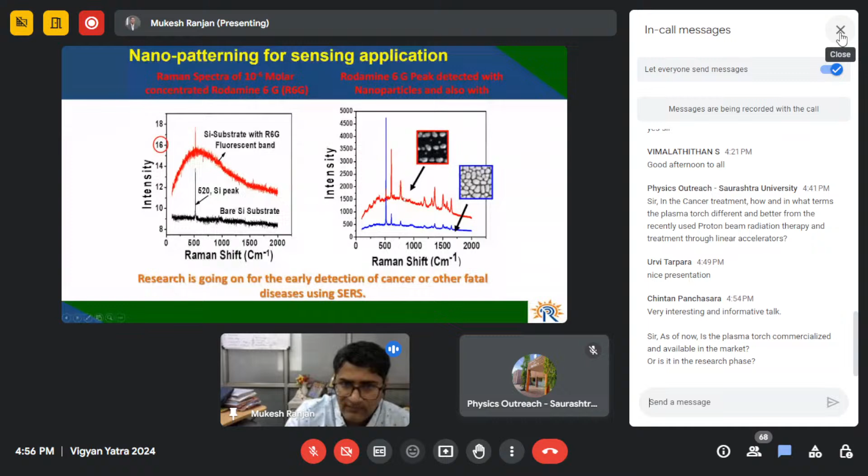The second example is when you use the same molecule and put a drop of it on top of the metal nanoparticle, you can see some peaks are visible. These are characteristic vibrational modes of the molecule, and this is a Raman spectrum. So this is the beauty of surface enhanced Raman spectroscopy, that it not only increases the intensity but is also able to detect a very, very low concentration of the molecules.

So if you have chains of metal nanoparticles, the signal is much stronger as compared to randomly distributed nanoparticles. That's the reason we wanted to have chains of nanoparticles, because its sensitivity is higher.

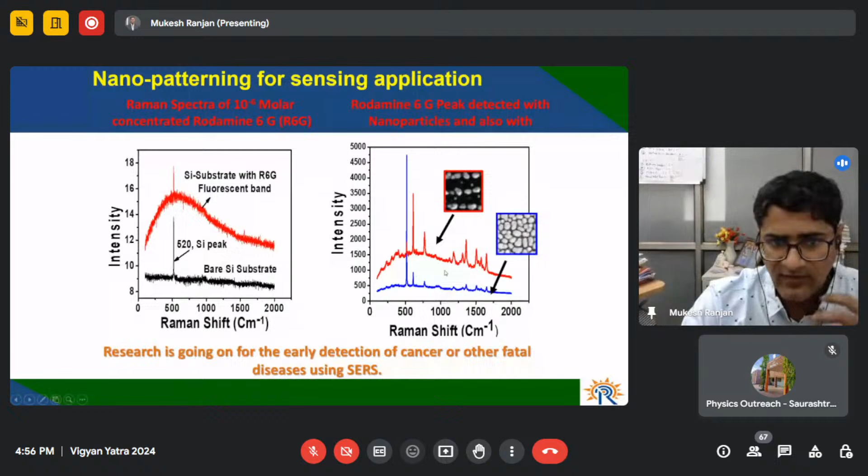So why do we need it? There's a lot of problem nowadays about food adulterants. If you Google it, you'll see that whatever food you are actually taking nowadays has been decorated using food adulterants. Different kinds of colorful dyes are used so that when you go to the market, the food attracts you easily. It makes it more beautiful, more juicy, more sweet. So all kinds of non-recommended food adulterants are used in the market because artificial injections are used. So there's a problem of how to detect them.

So with the help of this nano pattern I've shown you earlier, we have developed a sensor known as ASAN, IPR SERS nanosensor. With the help of handheld Raman spectroscopy, one can put a drop of any juice or food item you want to detect. For example, this is turmeric powder. They add methyl yellow dye, which is yellow in color, and that can be detected with the help of this sensor.

Chili powder, they add some red color. Watermelon juice, they add rhodamine B dye. And in milk, they add the food contaminant melamine. These are some examples which show that it's not easy to detect them at a very low concentration level, but with the help of this developed SERS pattern, you can detect their Raman spectra and then identify that they are not in pure form, and that some kind of dye has been used.

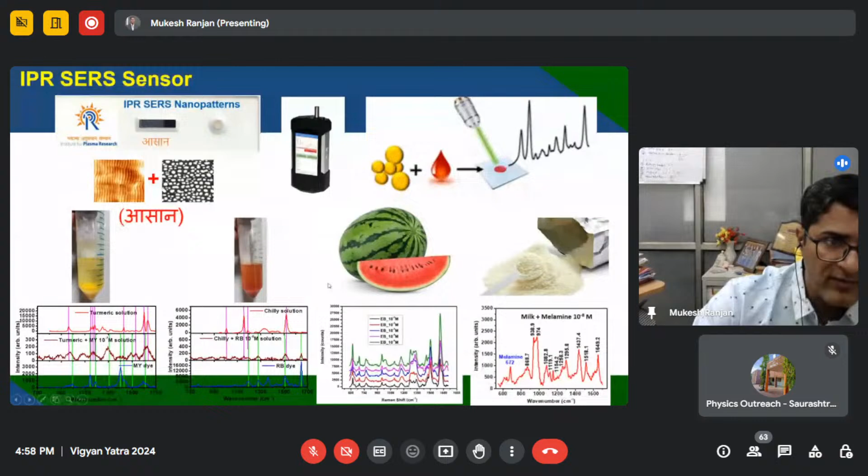So we are making a database of different kinds of food adulterants, and this technology has already been transferred to two Indian companies so that they can sell them to different needy people.

We have also detected different kinds of cancer cells. We are working in collaboration with Tata Memorial Cancer Research Institute. With the help of nanoparticles, we are able to detect the cancer cells. Raman spectroscopy is already used to detect cancers, but once you have metal nanoparticles or these patterned nanoparticles, you can detect them at a very, very low number. Typically, if you need 1 lakh cancer cells to detect it, now with the help of this nanoparticle array, you can detect them in very small numbers, like 1 or 2 or tens of cells.

If you read more about surface enhanced Raman spectroscopy, you can see that people are exploring it for different dimensions. People are using it for forensic applications, to detect cancer viruses, different kinds of cancers, and for dengue detection. So wherever there is a problem of detection, this kind of technique is very much useful.

Another technology developed at our place is by Dr. Bala—maybe day after tomorrow you will have a talk from Dr. Bala. He has developed a technology for making a large number of nanopowders for self-cleaning applications.

So if you are taking tea or coffee and some kind of droplet is found on your clothes, you can take this titanium oxide nanopowder on the surface and simply stand in the sunlight, and you will see that it is cleaning the surface. This nanopowder has the property that it absorbs light from the surface, makes the surface reactive, and removes the contaminant on the surface. Dr. Bala will talk more about this technology in his talk.

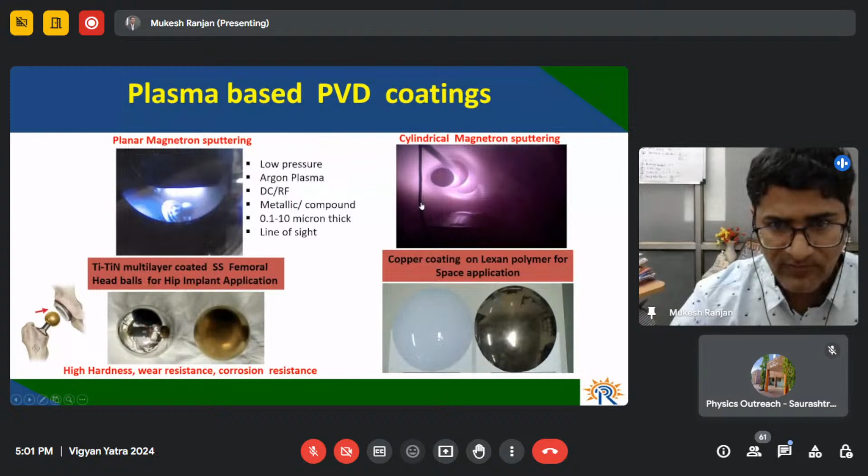We are making titanium nitride coated bearings for the satellites. We are making the flexible antenna concept for ISRO, and we are also working with them on plasma thrusters. Plasma thrusters are used for pushing the satellite when it moves from one orbit to another, to increase the length of the orbit. So time to time we are getting different plasma related requirements from the satellites.

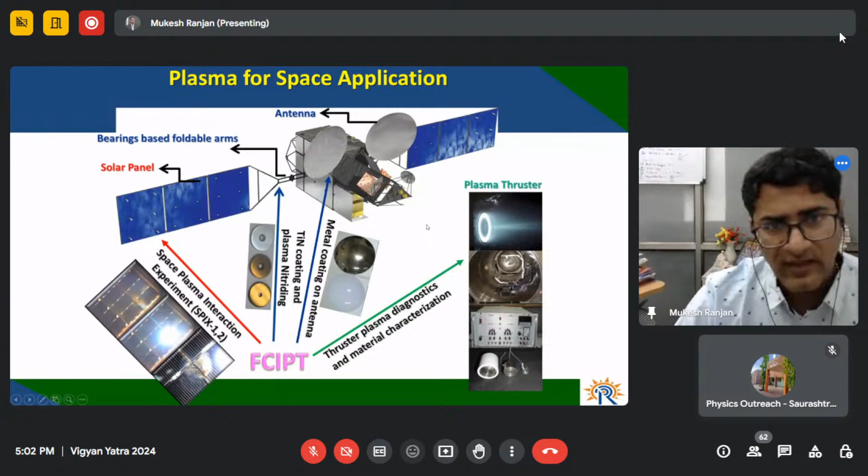So I'm touching one by one. This is the flexible antenna concept we developed in collaboration with SAC Ahmedabad. Normally the requirement in satellites is that we want to reduce the weight. Normally they were using a metallic reflector, like the dish antenna at your home which is made of metal. A similar kind of antenna is actually there in the satellite, which is very bulky. The requirement is you just need a metallic surface.

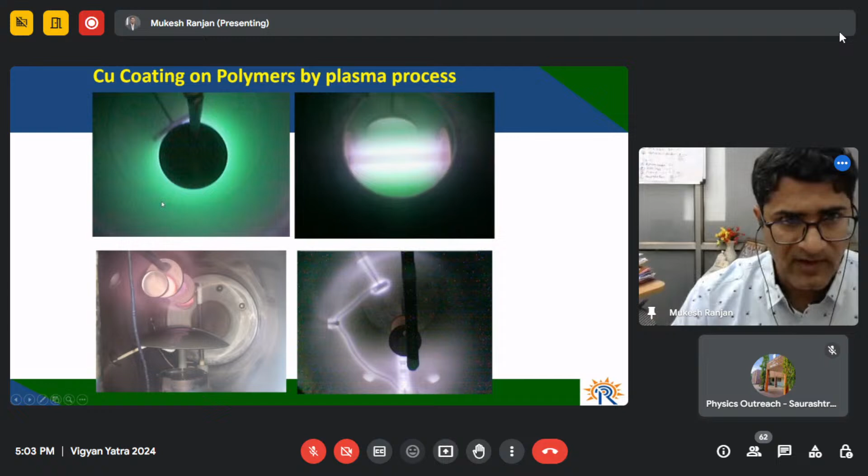So they came up with the idea: why don't we make a polymer based antenna? It's flexible, you can tune its diameter, and it also behaves like a metal. We developed it, but the requirement was to have a coating over a large area like 20 centimeters, 30 centimeters, 1 meter. So we indigenously developed a plasma-based sputtering system for them so that it can coat homogeneously over the polymer surface. Coating a polymer surface is not that straightforward like other coatings - the surface first has to be cleaned by the plasma process, and then the sputtered material has to deposit on the surface. So we successfully developed this flexible antenna for SAC Ahmedabad.

This is the polymer surface uncoated, and the second one is the coated one.

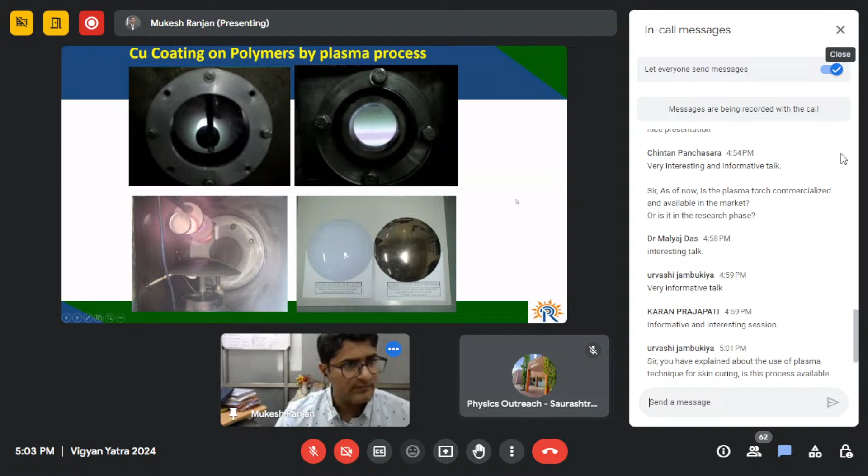Another project which was very successful is the development of plasma thrusters. A plasma thruster is again a device which is a kind of plasma gun. ISRO, different units of ISRO, actually started working on plasma thrusters several years ago, and it is very crucial because it is not only used to change the orientation and direction of the satellite, but nowadays it is also used to change the orbit.

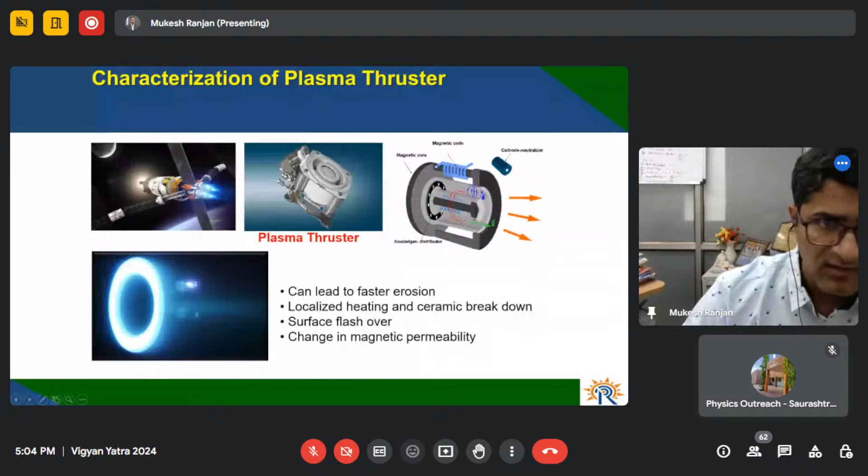Like in the Mars mission, they were simply firing the plasma thruster to increase its orbit, and during the latest moon mission, when it had to land on the surface, this kind of plasma thruster actually balanced the force because there is gravity there. The plasma thruster puts equal and opposite force on the satellite so that it can easily change orientation and then slowly land on the surface. That's the reason plasma thrusters are very crucial for space missions.

So ISRO - we not only helped them investigate the plasma properties of this plasma thruster, but we also helped them develop the materials used in this plasma thruster.

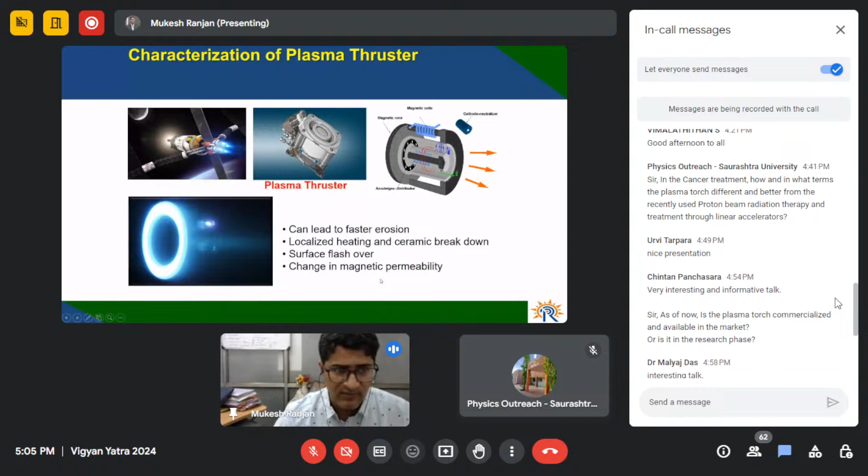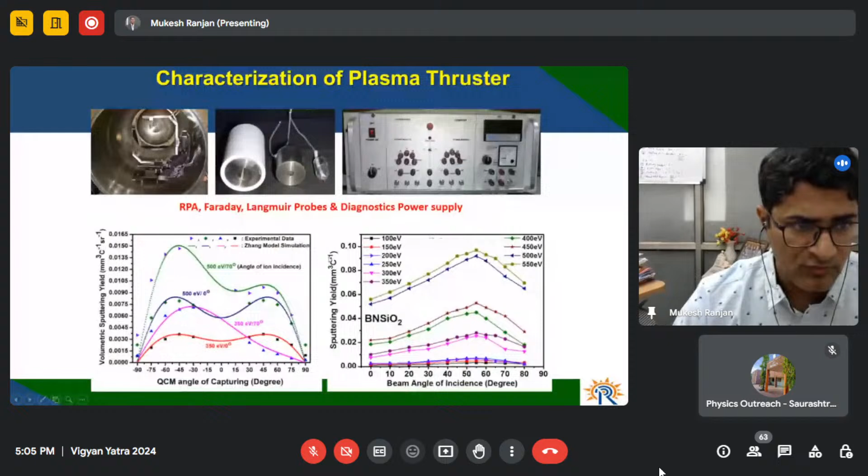These are the basic information when you fire the thruster you need to calculate the thrust produced by the plasma thruster. And at the bottom are some plots where we actually investigated how the material is eroding from the surface when we are firing the plasma thruster. So this white color ceramic started eroding. They wanted to know how much time it will run, for how many hours it will run once it is completely removed. So those kind of experiments are performed at our lab regularly.

Another example is space plasma interaction. When the satellite is going to the lower Earth orbit, there is a low density plasma available there. When the solar panel is coming in contact with this low density plasma, its surface started charging, and in space there is no ground. We know that the top surface of the solar panel is dielectric in nature, it's glass. So whenever charge is coming, the charge gets accumulated there, it behaves like a capacitor. And the amount of this charge can be so much that it started creating the arc.

And I can show you the real proof. So you just see this movie. This solar panel is kept inside the plasma. You can see that some kind of arcing happening in between the two solar panels. And yeah, these are the images captured by a very fast CCD camera.

So we developed a facility for ISRO to see whether in presence of plasma this kind of arcing happening, and if it is happening, what is the arc duration, where is the prominent location, and is it happening only at one place or at multiple places. So over a period of time we generated a lot of database for them and developed a process where the solar panel has to be tested in plasma.

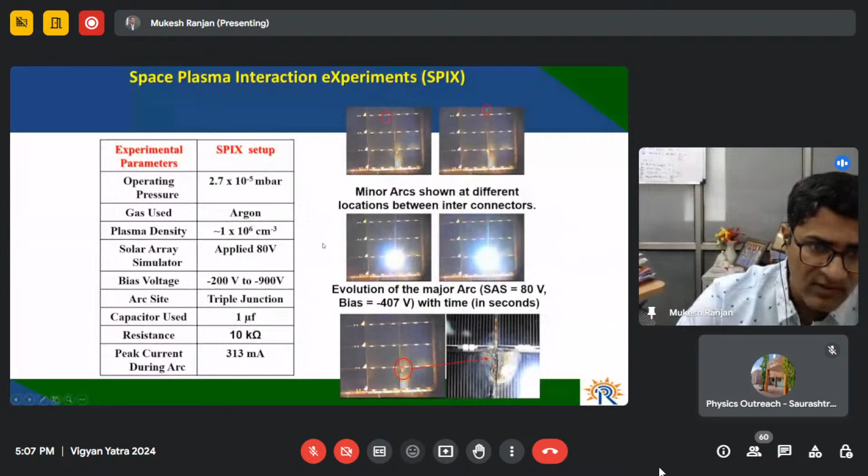So with this, I have very quickly briefed you about the various plasma-based technologies. And if you see all of these technologies, actually not only physicists are working on them, people of all disciplines - electrical engineers, mechanical engineers, chemical engineers, chemistry people, biology people, textile people, doctors, all of us - because it's an interdisciplinary subject. So many people and many students are, time to time, working on developing these technologies.

So this is my final remark, that we invite students to join some of the technologies we are working on here and then contribute for the societal application of plasma. Thank you very much for your attention.